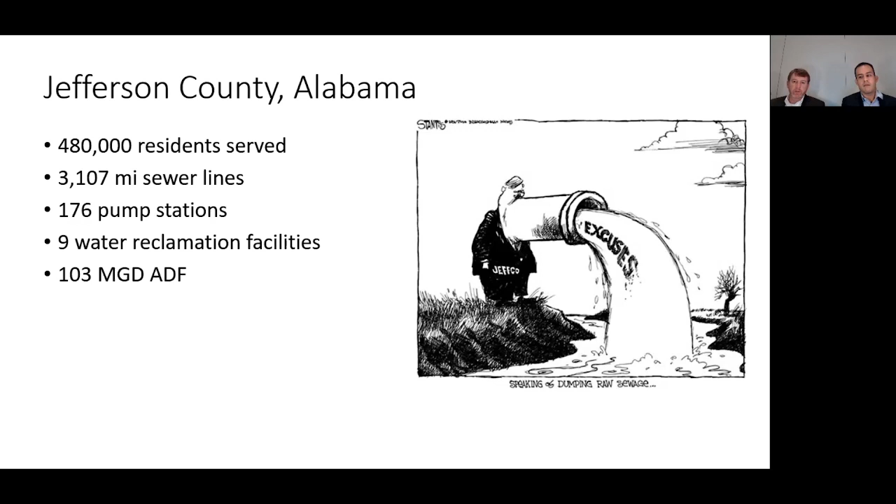This cartoon was published several years ago in Jefferson County following a large spill. Now, that spill has since been corrected, but Jefferson County still has SSOs. They still persist. In fact, wet weather SSOs are the number one driver in our capital improvement program. As water professionals, we all know that the public really deserves more than excuses, and it's our duty to provide the best, most effective solutions that are the least burdensome. And we believe what we're presenting today is an approach for that.

So the county has a 25-year history with capacity improvement strategies for peak flows. Right, those former plans really focused on larger treatment plants with on-site storage at the plant, larger pipes, and maybe we achieved as much as 20% I&I removal through CIPP. Following 2008, financial constraints the county was in really forced us to adopt best management practices in terms of asset management, but also looking at better engineering solutions for our problems. We were looking for the biggest bang for the buck. We needed the best return on investment.

We had tried many times, but we were really never effective at being able to forego capacity improvement projects with rehab only and I&I reduction through rehab, focusing on the main line and not on the lateral connection. But then we tried some different approaches, right? And I think we came up with a solution that's repeatable and effective for significant I&I removal through full comprehensive rehab.

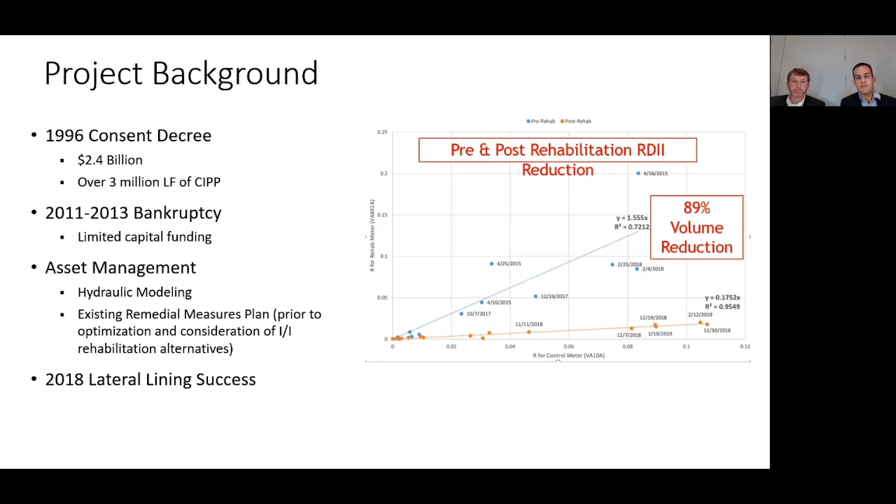So with this change, being able to consider as much as 50 or 60% I&I removal for capacity reductions, Hazen and Sawyer, who we worked with on our model development and also on our initial remedial measures planning, brought to us WCS and their capabilities for optimized planning. So there was a concept of being able to take a well-developed hydraulic model, good engineering assumptions, well-established cost data, and then being able to evaluate countless what-if scenarios to come up with the right mix and also the right order of I&I reduction, capital improvements, interbasin transfers, pump station improvements, you name it. If it was a possibility within our system, it could be considered through these iterative solutions. David is going to take over and explain this process.

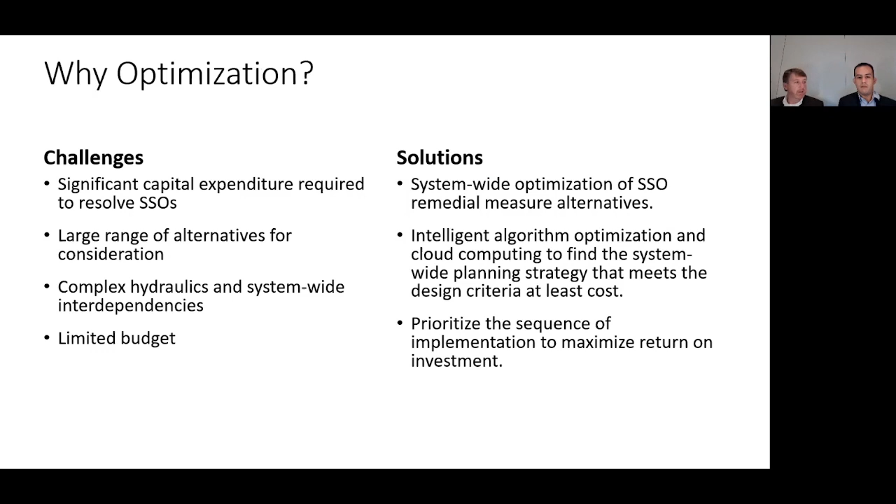All right, thanks. So one of the key parts of this program, before we even start the optimization, is that we need a well-calibrated hydraulic model that was used as the whole basis for this analysis. The model for this particular project was provided by our partners at Hazen and Sawyer, and we then took that into the optimization process.

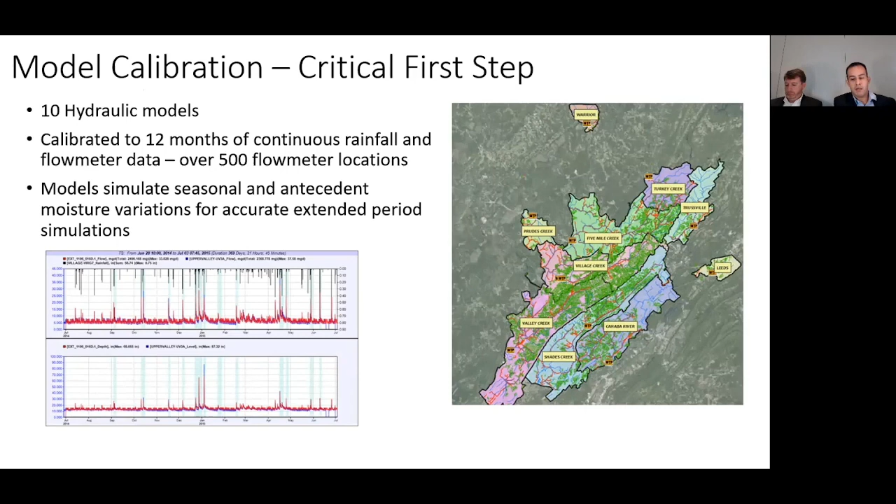So the key takeaways that I want everyone to think about today are, number one, how the cost savings of this approach reduce the total project cost over traditional trial and error modeling. The second one is how we looked at I&I reduction and were able to optimize over 200 flow meter catchments and pick the right investment that balances I&I reduction, conveyance improvements, and storage and treatment at the plant.

The third one is the approach that we took to do the sensitivity of that I&I reduction. Given the high numbers that the county was seeing in their I&I reduction plan, we wanted to see if they didn't continue to achieve those same results, how would that affect the strategy of the master plan? And lastly, how we prioritize and pick projects to determine the best return on investment and which projects to construct first over the course of the implementation plan.

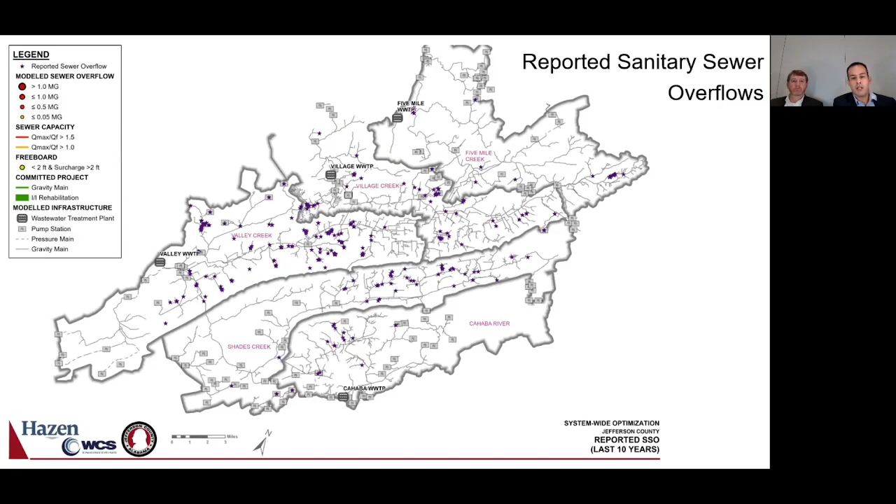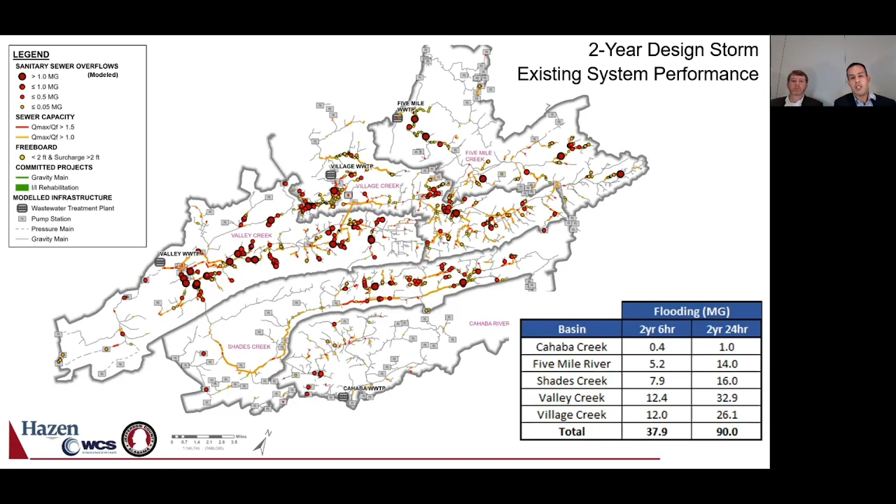So this first map here shows the reported SSOs throughout the collection system. This is 10 years of SSO history. And referring to earlier when we said we had a well-calibrated hydraulic model, as we look over into the model system performance, you can see how those SSOs correlate very well with the model predicted SSO locations in the hydraulic model.

So this next map here shows the complete range of improvement alternatives that we're considering as part of this project. This isn't everything that's going to be built. This is everything that we have determined could help solve the problem, giving the optimizer choices on what to select in order to eliminate the SSOs and achieve compliance with the design criteria.

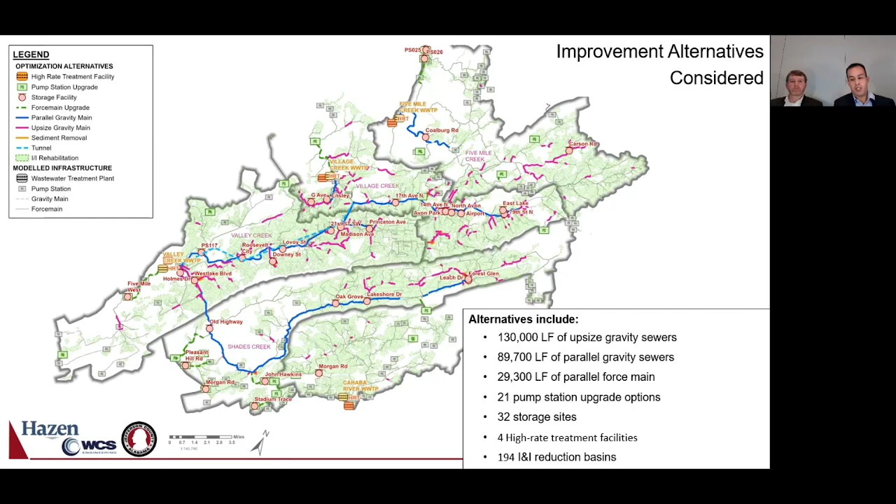So the question is, with all these alternatives, including I&I reduction, like I said, in over 200 catchments, how do you effectively analyze and compare and contrast these with each other and come up with the right balance of costs? So this is where we bring in the optimization platform. At the heart of this is Optimizer from Optimatics.

So it incorporates the hydraulic model, the improvement alternatives that we just looked at, a strong cost model, and the design criteria that we're trying to achieve. So all this comes into Optimizer, and we use the power of the cloud to run over 100,000 evaluations in combinations of all those alternatives in order to come up with a least cost solution.

From that point, we then have the ability with this tool to quickly test and analyze the sensitivities of the project. So in this case, the primary question is, what if I&I reduction is less effective? How is that going to change the strategy, and how important is that to selecting and designing the improvements?

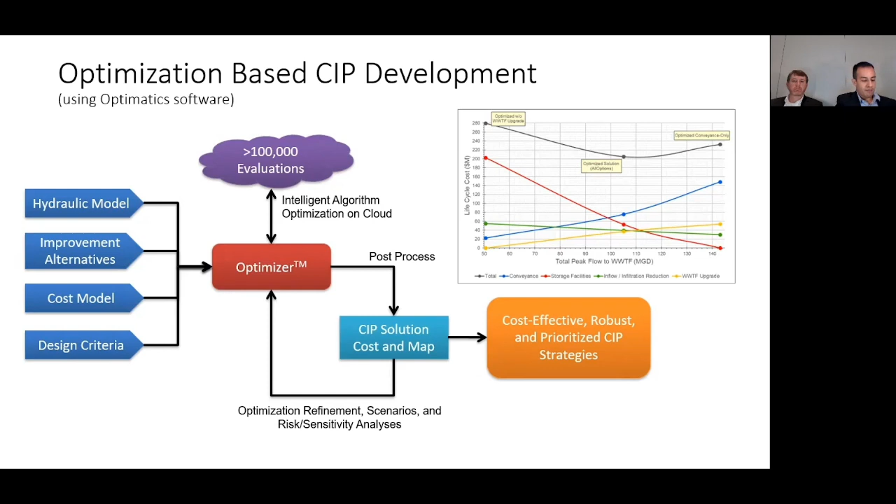So this is a list here of the design criteria and the assumptions that were used for the project. The two most important ones that I want to point out is we're looking at 2 design storms in one optimization run. So we are looking at the 6-hour event to size the conveyance improvements, and then the 24-hour event, which is controlling the sizing of the storage options in the system.

And also, we want new sewers to be designed well so that they don't have any surcharge in them. And also, so we're not building big pipes into little pipes and back into big pipes. We want solid continuity to take forward into design.

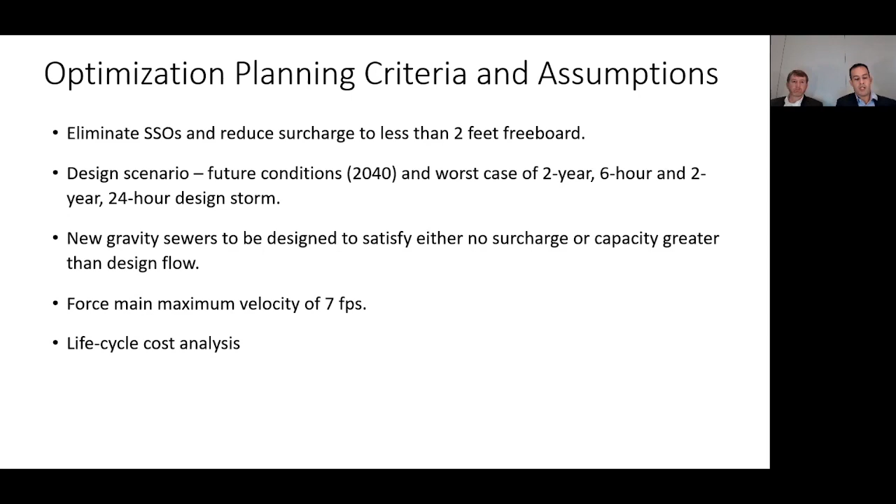This is an example here showing the cost model used for the analysis. The analysis takes into account total life cycle cost. So all the alternatives are being evaluated over their entire lifespan, and everything will be compared at the end on the total life cycle cost of the solution.

I just want to add that asset life is a really important factor for us as the owner of the asset, because it brings out not just SSO reduction, but our total investment into the system over a much longer time frame. It's a different perspective on solving this problem, not just the immediate SSO reduction, but what are my investments into the system over the life of the assets.

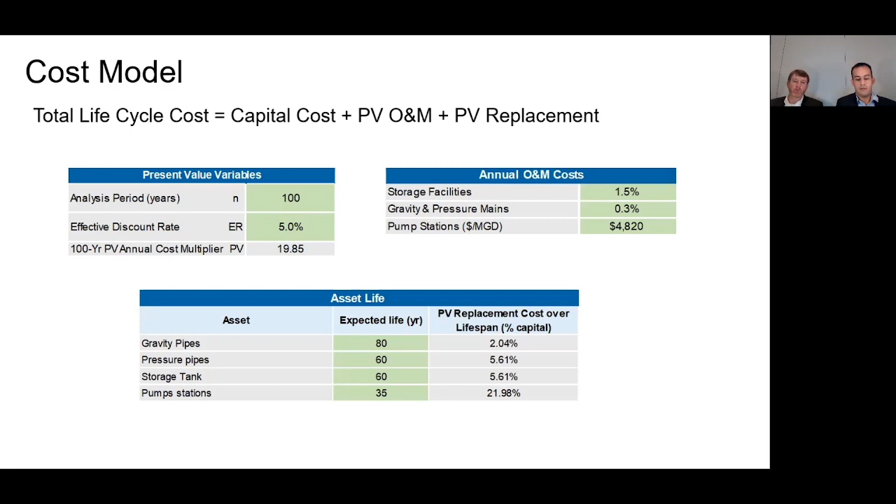Thanks. Yeah, and here's another table that shows even more the parameters that we took into account when developing the cost for each type of improvement. All these costs were generated by the county and our partners at Hazen.

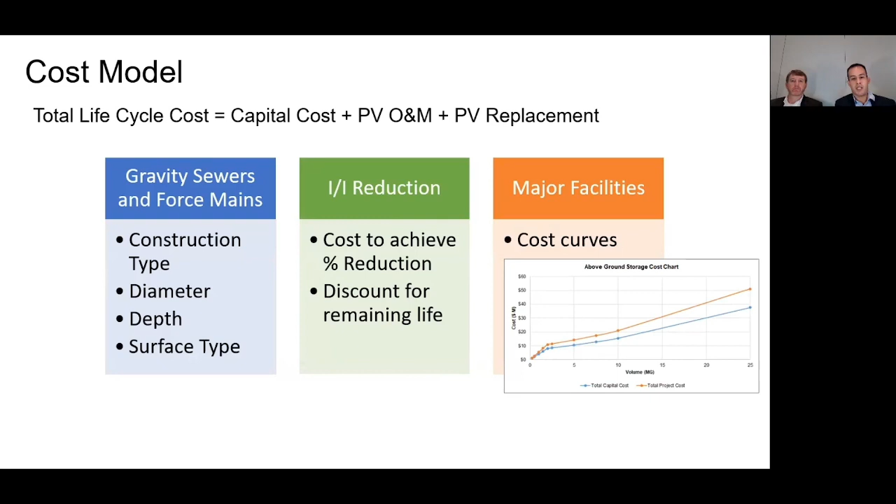Okay, so let's start getting into some results here. So we start with a bookend solution. So this is conveyance only. We don't want to overwhelm the optimizer with too many options at first. We want to see what is the most extreme cost solution here. So we only allow it to pick the conveyance only improvements, and we're just taking everything down to the plant.

In this case, we're looking at a real high cost of $1.2 billion capital and almost $1.4 billion in total life cycle. So the next step is then we start layering in different types of improvements. That way we can specifically see what is the cost savings related to introducing that type of improvement.

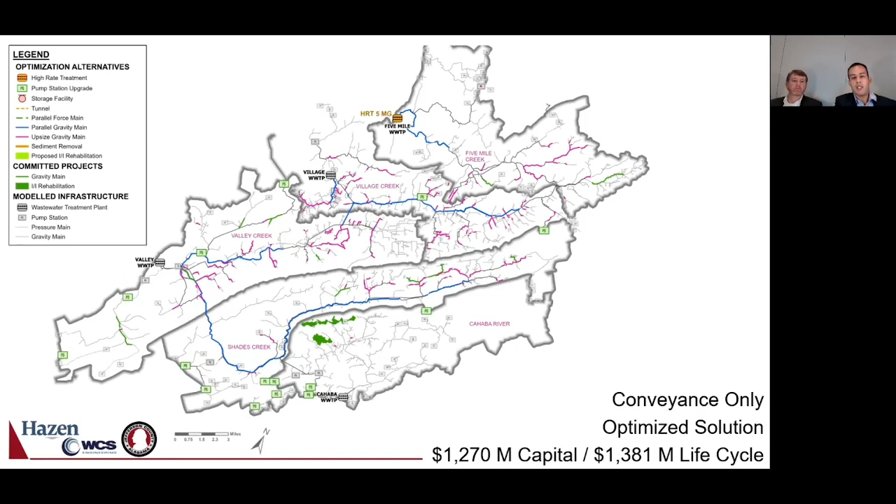So then we introduce storage to the optimization, and we rerun it and see what the least cost solution is with storage included. And you can see that the costs have reduced dramatically. But what's also handy is as we flick back and forth here, you can see very clearly where those storages are contributing to removing required gravity sewer improvements. You can also see the size of those storages as they're being designed and selected in the software.

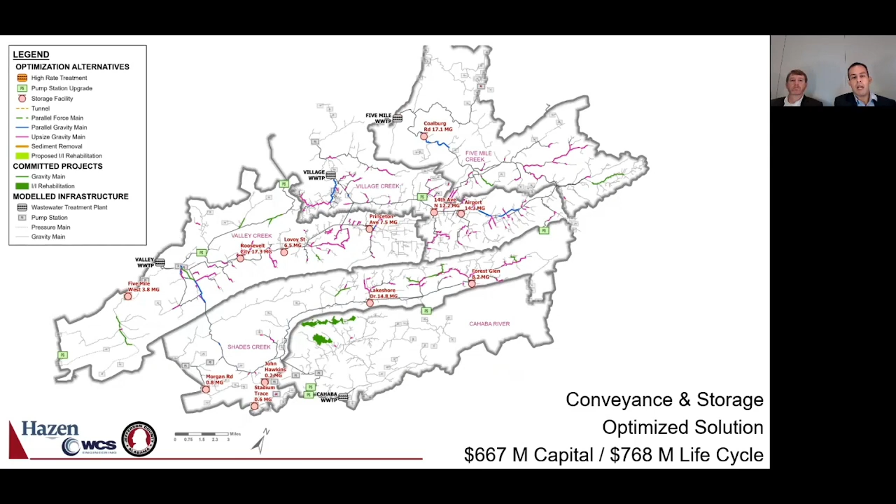The next step here was then to introduce I&I reduction into the equation and see how that affects everything. And so with this first solution, we start off with the conservative I&I reduction solution. So this is what if we spent the cost associated to eliminate, let's say, 20% I&I in a particular catchment, but in post-rehab monitoring, we see that we only got 10%. So we're still spending the full budget, but we're only seeing half effectiveness. And what does the strategy look like?

And again, we can go back and forth and see which catchments are being selected for I&I reduction, which I&I reduction levels are being selected as targets for each particular catchment, and where those are offsetting conveyance and reductions in storage volumes.

So the next step here was then to introduce what we call the aggressive I&I solution. And so this is if the county were to spend all the money and got full effectiveness out of the program. And you can see here what's most interesting is that most of the catchments are the exact same locations as the conservative. So this gives the county a real strong platform and basis for chasing down I&I in those catchments, because it shows that no matter what the effectiveness is of the programs, they're still being cost effective in those locations and are contributing directly to SSO reduction and eliminating other alternatives, including conveyance and storage.

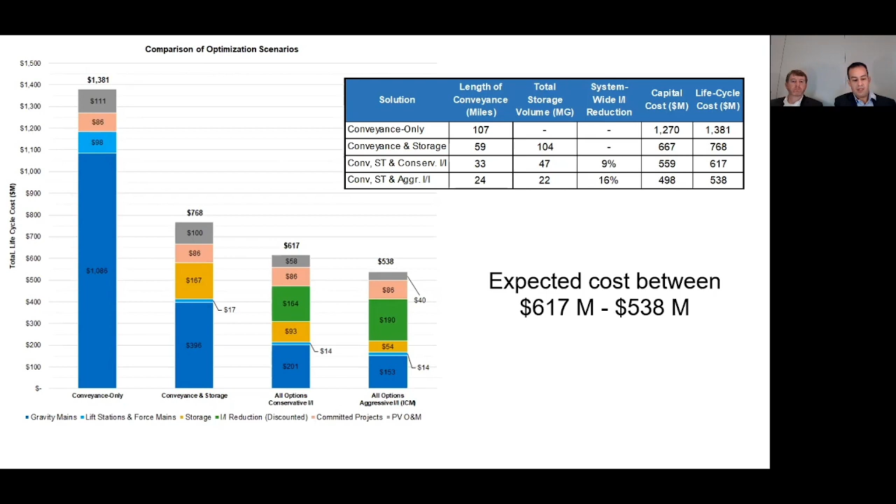So the next step here was to prioritize the improvements and come up with a strategy for implementing these projects. So we set up the optimization, again, using Optimizer to select projects from the selected solution, and to develop that schedule of implementation that's going to maximize the return on investment. And so in this case, we want to reduce volume of SSO, and we want to reduce the count of SSOs.

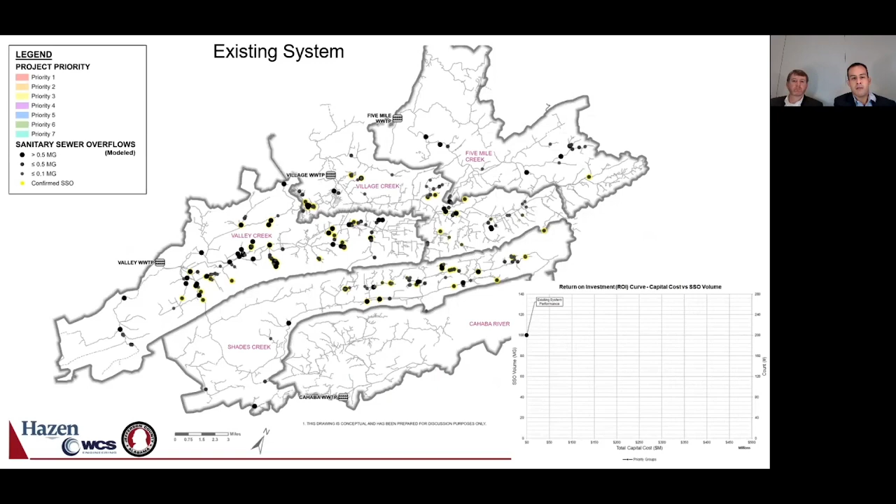So as we look at the priority 1 projects that are selected, we can toggle back and forth, and we can see where those initial projects are contributing directly to elimination of SSOs. So the priority 1 projects here are a few catchments of I&I reduction, and then a couple of small conveyance improvements to relieve some serious system bottlenecks. And what's interesting with this first pass of priority 1 improvements, you can see in the upper right corner, we've already reduced our total volume by almost 20% by only spending 3% of the budget.

So then we look at the next year, and we start introducing new projects. Again, all these projects have a similar return on investment and contribute directly to that volume reduction. So we step to priority 2. You see the volume being reduced and expenditures going up. Same thing with priority 3 projects. Again, SSOs are disappearing from the map, and volumes are being reduced.

I want to pause here on priority 4. This is an interesting slide because now our first storage has been selected right in the middle of the map at Princeton Avenue, and then again in the lower left or right corner at Forest Glen. So these being priority 4 projects, these projects are so far out in the future that the county knows that they need to start planning for these storages to be built eventually.

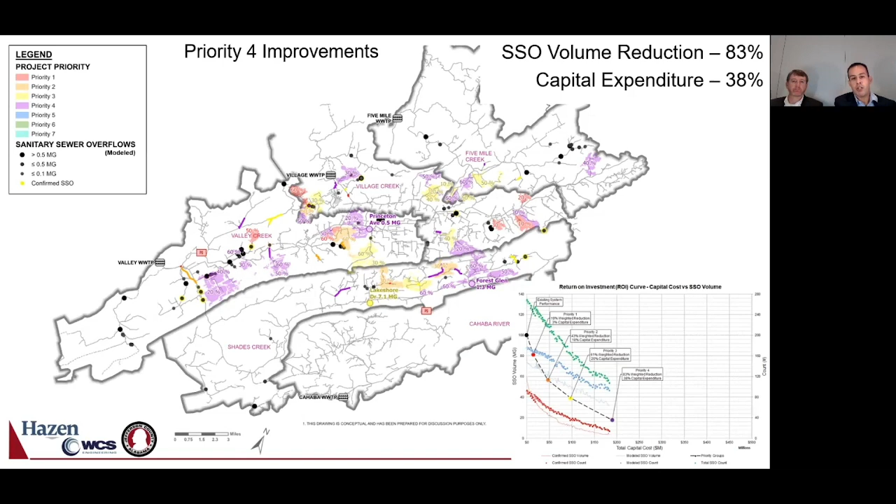But as we get through the I&I program and seeing the effectiveness, we can adjust the sizing of those systems as we get through the I&I rehab. Right. We can measure, quantify, and then design for those actual conditions. Right. And the locations are shown to be effective. So we know that we need to start land procurement and preliminary design in those areas early, since we know they have to be built eventually.

We keep on going through priority 5, and now the numbers start to get more interesting as we get through the later priority levels. So now we've achieved 93% SSO reduction, and we've still only spent half of the budget. Now looking here at priority 6. So again, 99% reduction in volume, but we've only spent 3/4 of the budget, which means that last 1% is very, very expensive to be able to chase down and eliminate.

And I think by having this strategy of continuously updating the model and seeing how the rehab actually comes out, then we can see if that last 1% is still going to be out there, or if we're expecting more, or if it's even worth trying to chase down in some cases.

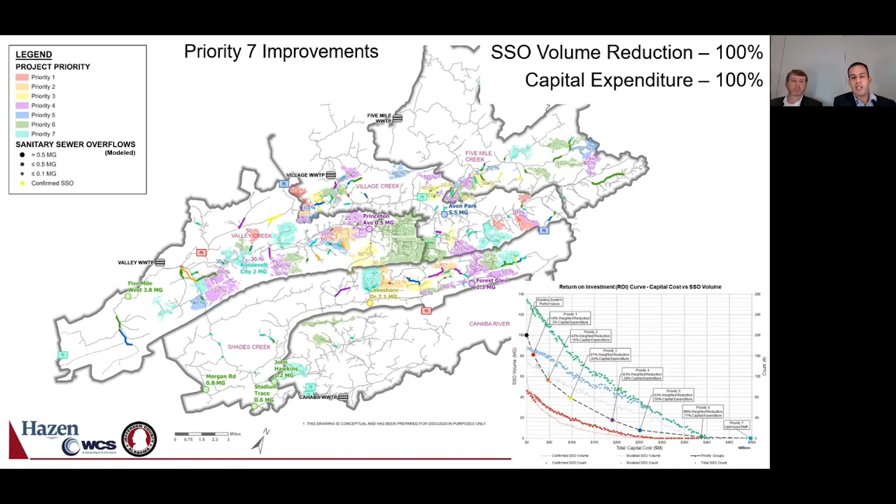And then lastly, the last projects. So we show full implementation of the program. So again, here's that full return on investment curve, again showing all the projects being implemented and their impact on the total volume reduction.

So yeah, I want to revisit those key takeaways that we talked about earlier. So we saw on this particular project about 20 or 30% reduction in total cost savings over the traditional trial and error solution that was previously generated for this program. We also were able to establish a maximum amount of money that should be spent in each flow monitoring catchment, that way to avoid that diminishing return on cost effectiveness.

The conveyance improvements were sized conservatively based on that I&I reduction sensitivity, and that's going to allow flexibility if the I&I program isn't as effective. We've got that conservative sizing, so the improvements can be built that way to expect the higher flows if we don't get the full effectiveness of the I&I program.

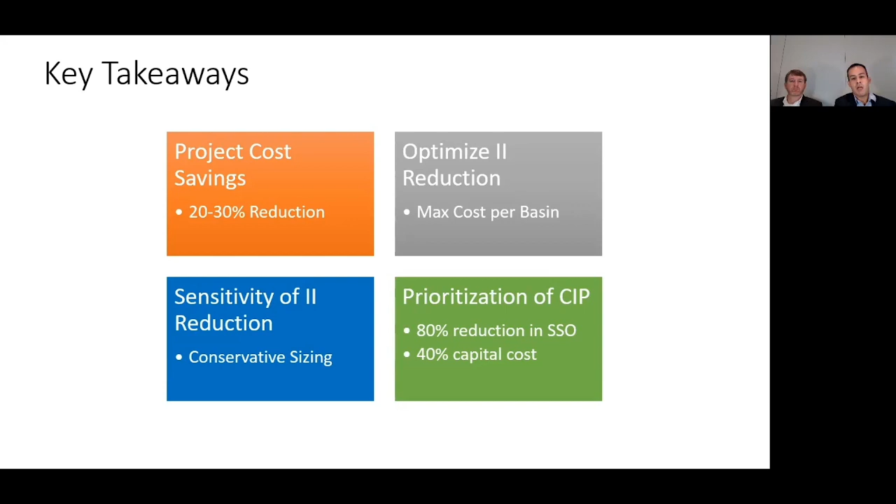Lastly, we showed that with the prioritization investment schedule, we were able to achieve approximately 80% reduction in SSO volume and counts, but with only 40% of the total capital expenditure. I'll let Daniel wrap up about how they're using these results in their program now.

Right. So being able to go through and have this phased approach allows us to really hit on SSO volume reduction first. Taking that, bringing that into financial models as well, and looking at affordability issues, and just having a very iterative process of looking at our schedule, our funding, our finances, and bringing that all together so we can achieve these results that we're looking for.

In conclusion, really to say that I've been very pleased with the process. The effort resulted in a phased capital improvement program that prioritizes spill volume reduction. It supports asset renewal, and it allows this ability to measure and then adapt. Time to measure and adapt and adjust to what those changing conditions are.

A lot of assumptions go into this on cost, on rehab effectiveness, and we want to move as those results come in. Really expected that this process is going to ultimately meet our objectives and bring in considerable cost savings over what would have been achievable with traditional planning approaches.